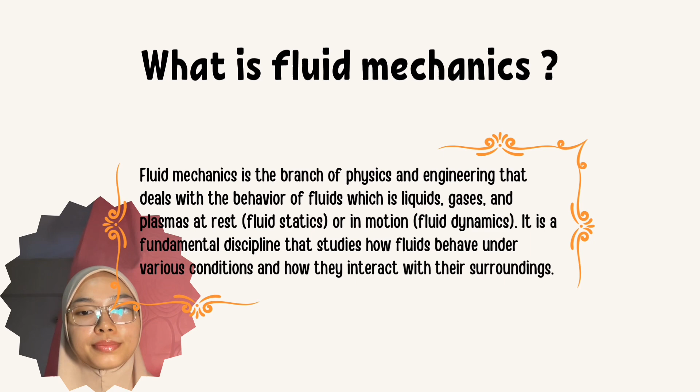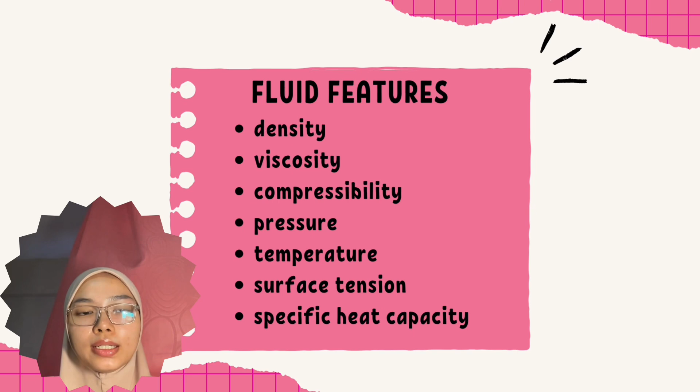This is the list of the fluid features that I will present: density, viscosity, compressibility, pressure, temperature, surface tension, and specific heat capacity.

First, I will start with density. Density is a fundamental property of fluids that describes how much mass is packed into a given volume. It plays a crucial role in understanding and predicting the behavior of fluids in various applications across science and engineering. Density is defined as the mass of a substance per unit volume, ρ equal to m over v. In the SI unit, density is typically expressed in kilograms per cubic meter. In other systems, it may be expressed in gram per cubic centimeter or pound per cubic foot.

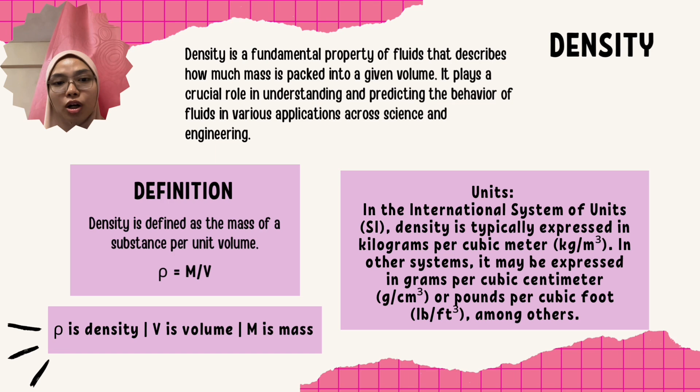Next is viscosity. Viscosity is a fundamental property of fluids that describes their resistance to flow. It influences how fluids move and behave under various conditions, making it a critical parameter in fields such as fluid mechanics, chemical engineering, and material science.

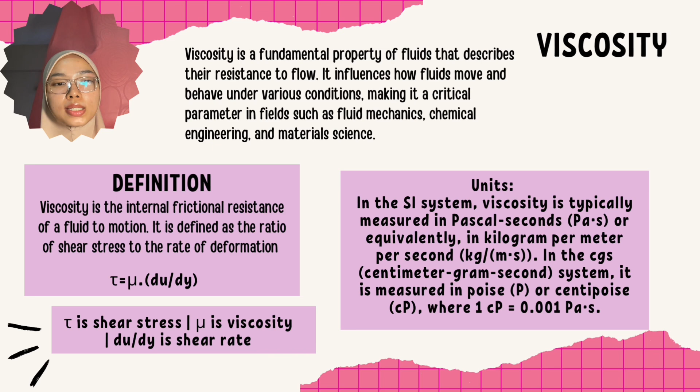Viscosity is the internal frictional resistance of fluid to motion. It is defined as the ratio of shear stress to the rate of deformation, and the equation is shown in the slide. In the SI system, viscosity is typically measured in Pascal seconds, or equivalently in kilogram per meter per second. In the CGS, centimeter gram second system, it is also measured in poise or centipoise, where 1 centipoise equal to 0.001 Pascal second.

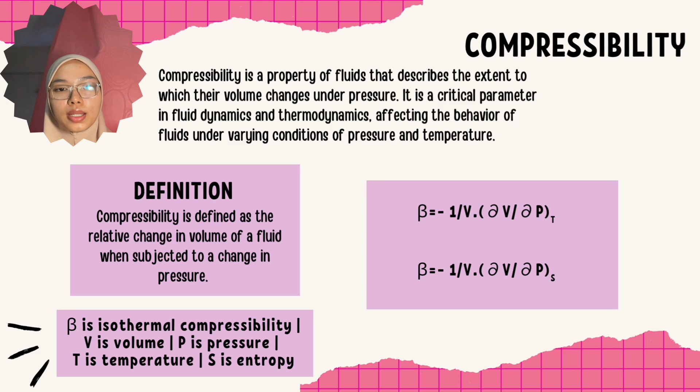Next is compressibility. Compressibility is a property of fluids that describes the extent to which their volume changes under pressure. It is a critical parameter in fluid dynamics and thermodynamics, affecting the behavior of fluid under varying conditions of pressure and temperature. Compressibility is defined as the relative change in volume of a fluid when subjected to a change in pressure, and the equation is shown in the slide.

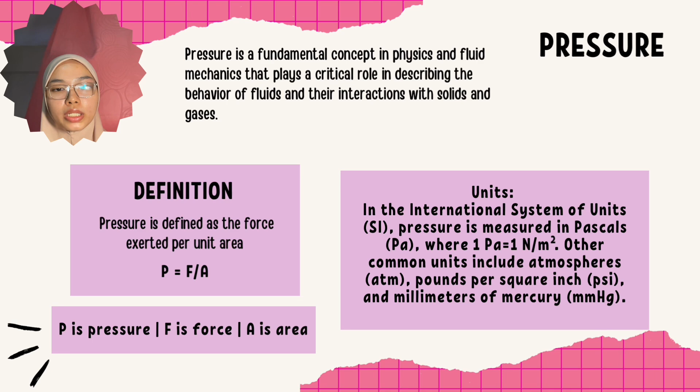Next is pressure. Pressure is a fundamental concept in physics and fluid mechanics that plays a critical role in describing the behavior of fluids and their interactions with solids and gases. Pressure is defined as the force exerted per unit area. The equation for pressure is P equal to F over A. In the SI unit, pressure is measured in pascals, where 1 Pascal equal to 1 N over m squared. Other common units include atmosphere, pounds per square inch, and millimeters of mercury.

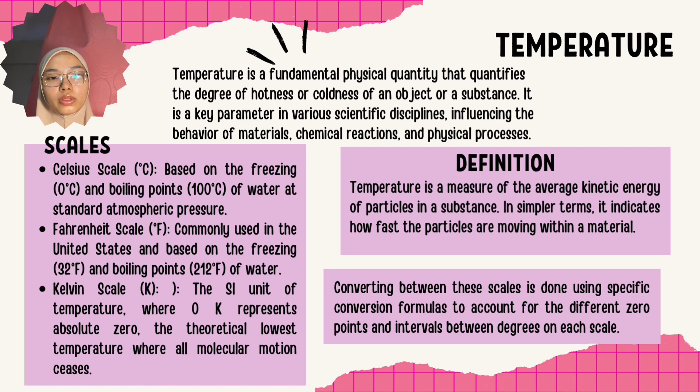Next is temperature. Temperature is a fundamental physical quantity that quantifies the degree of hotness or coldness of an object or substance. It is a key parameter in various scientific disciplines, influencing the behavior of materials, chemical reactions, and physical processes. Temperature also is a measure of the average kinetic energy of particles in a substance. In simpler terms, it indicates how fast the particles are moving within the material. The scales usually used are Celsius, Fahrenheit, and Kelvin, and converting between these scales is done using specific conversion formulas to account for the different zero points and intervals between degrees on each scale.

Next is surface tension. Surface tension is a fascinating phenomenon in physics that describes the cohesive forces acting on the interface between a liquid and a gas or another liquid. It is a result of intermolecular forces between molecules within the liquid, creating a kind of skin or film on the surface that resists external force.

Surface tension is defined as the force per unit length acting at the surface of a liquid in contact with air or another medium. It is measured in units of force per unit length. On a molecular basis, surface tension arises from cohesive forces between molecules within the liquid, particularly at the surface where there are fewer neighboring molecules to interact with. This results in an inward cohesive force that minimizes the surface area and tends to pull adjacent molecules closer together.

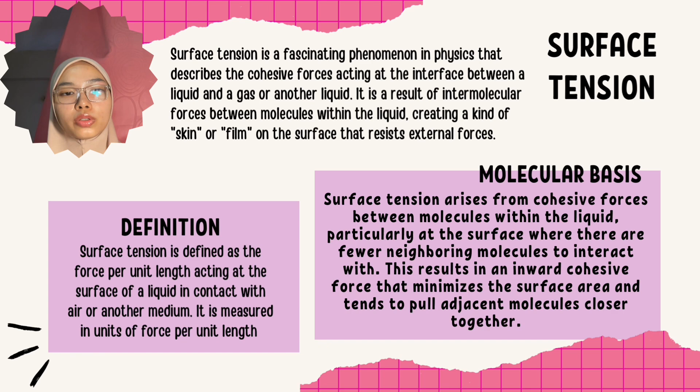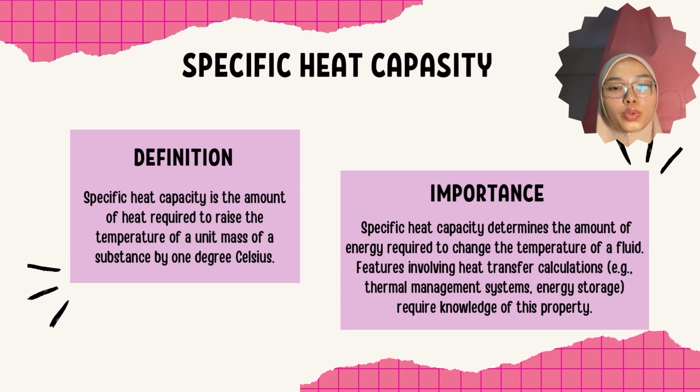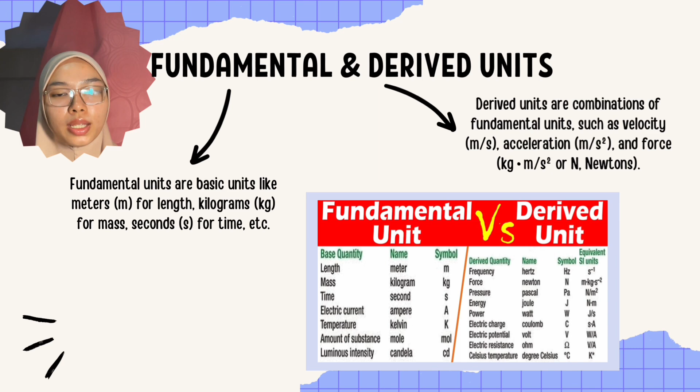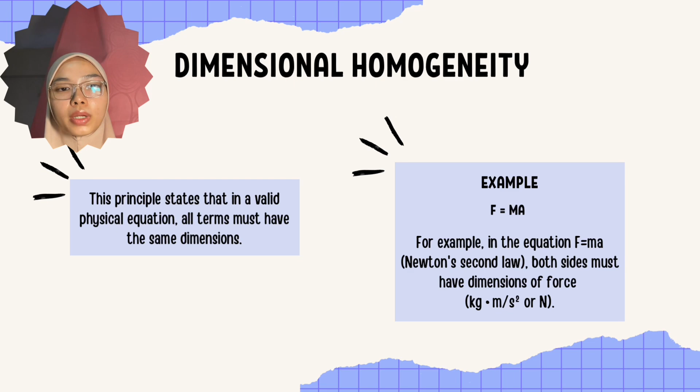Next is dimensional homogeneity. This principle states that in a valid physical equation, all terms must have the same dimensions. For example, in the equation F equal to ma, which is Newton's second law, both sides must have dimension of force.

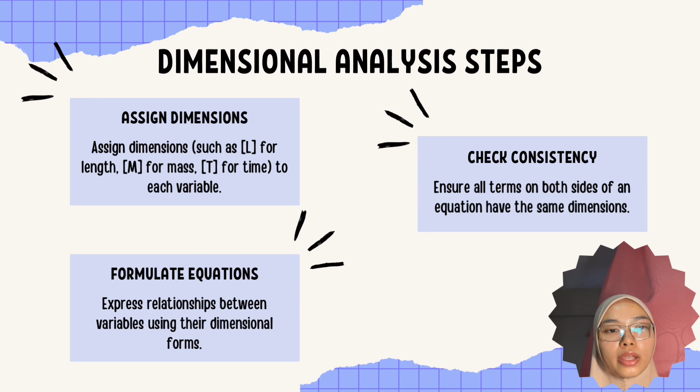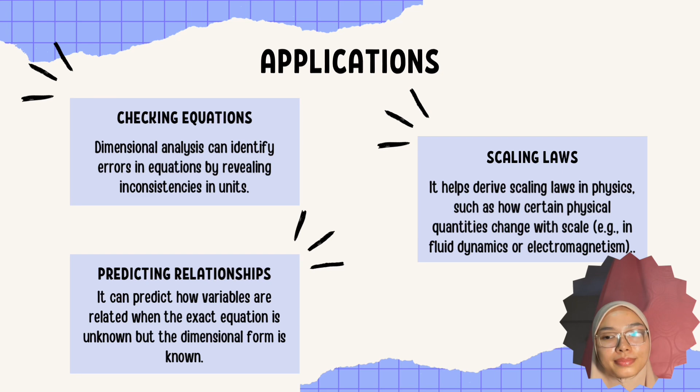Lastly is the conclusion. Dimensional analysis is particularly valuable in fluid dynamics because it allows us to understand and predict the behavior of fluid without needing detailed knowledge of their specific properties. By focusing on fundamental dimensions, such as length, mass, and time, dimensional analysis helps us derive dimensionless numbers, like Reynolds number and Mach number, that characterize fluid flow phenomena. These dimensionless numbers reveal how different forces influence the flow patterns and behaviors of fluids across various scales.

In essence, dimensional analysis simplifies the complexity of fluid dynamics by highlighting the essential relationships and scaling laws that govern fluid flow.